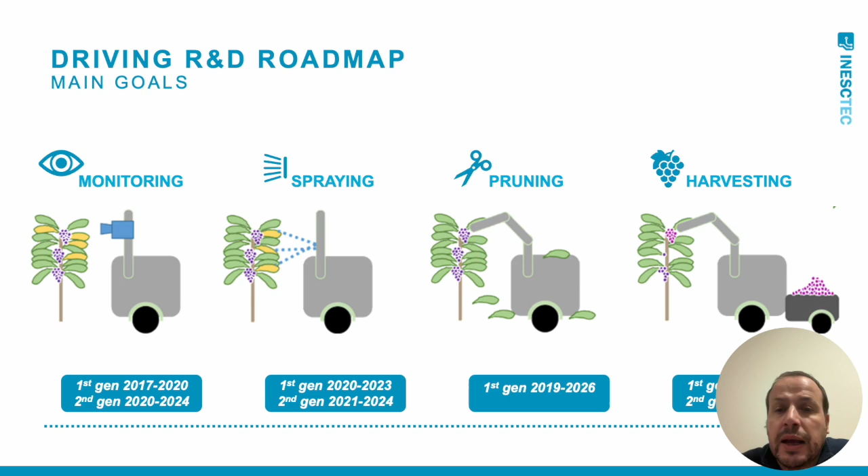As I mentioned, we are a laboratory and a multidisciplinary team. To work on these topics and challenges, we need to tackle this from several perspectives, which means we have several components to work on. At the moment we have 6 groups of R&D topics: safety, mission, supervision, and interoperability, which is in both sides of robotics, IoT and automation.

The outdoor field and navigation topic has several channels to tackle, mostly to solve the problem of navigating in places where we don't have GNSS, or even when the terrain is not flat and has slopes, where the robot needs to be aware of its center of gravity.

We are working a lot on perception systems using AI and deep models to understand the environment, manipulation and grasping, embedded systems and advanced sensors, mechatronics and advanced mechanics.

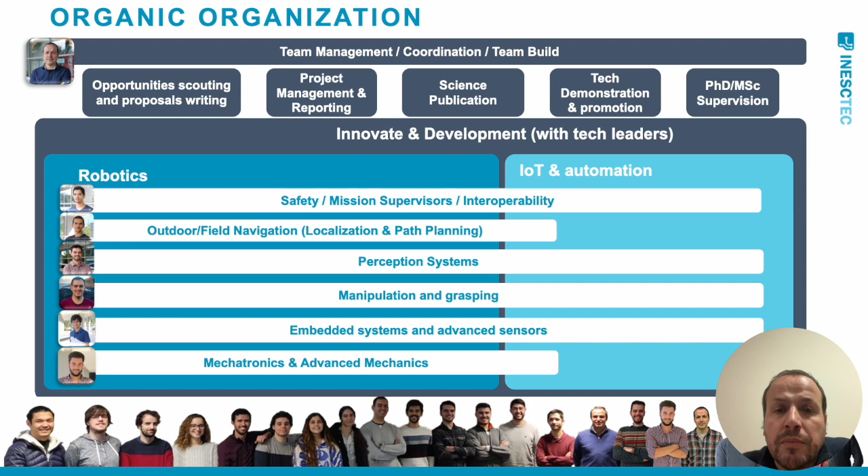At the moment we are 13 persons working in this laboratory, and this is our organization. So the PhD and master's theses developed in this group are supported by a big team that helps make the PhD work more impactful for society, but even more impactful for the PhD candidates.

To support our technology deployment and validation, sometimes this is very relevant also for our PhD candidates: to collect real data in real conditions. To do that, we have at the moment 5 places where we can do these experiments and data collections.

To not take too much time, I will show you some of the results of the laboratory. This is the first robotic solution: a robot navigating in a steep slope vineyard, moving fully autonomous even if the GNSS fails, with path planning.

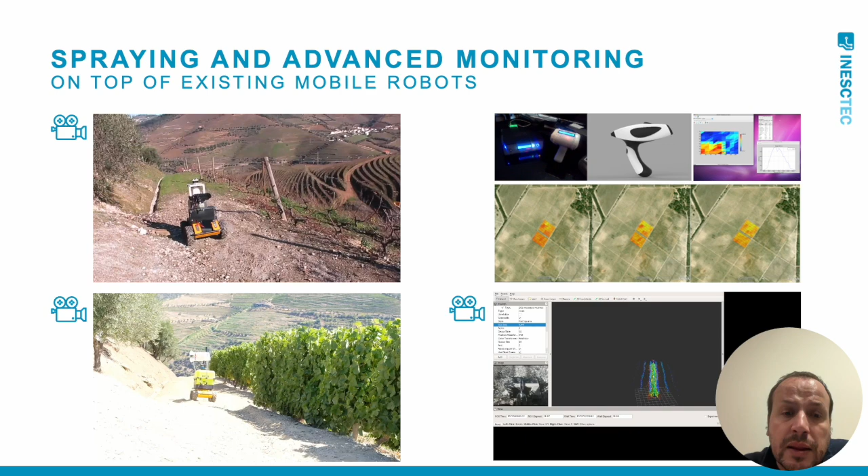This has supported 2 PhD candidates at Inesc who defended their PhD 2 years ago at Utad, and this was a prototype that supported this work. This is another technology.

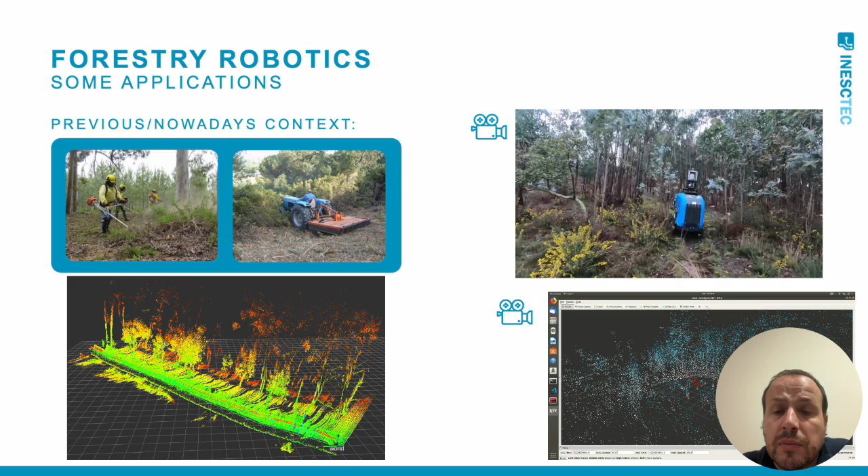This is a forestry robot for biomass collection, and this has also supported the PhD work of another PhD student who defended this PhD thesis 1 year ago at Utad. And this is another robot, the same robot from forestry that we have applied to precision spraying in vineyards.

Taking into consideration that to put this on the market we need technology more prepared for small and medium companies, because they have very limited R&D departments, we have needed to rethink how we can do robotics.

In this way, 2 years ago we had a new start defined as building the full robots from scratch. This will help transfer the technology more easily to the market and support more PhD candidates, not only in software but also in mechanics.

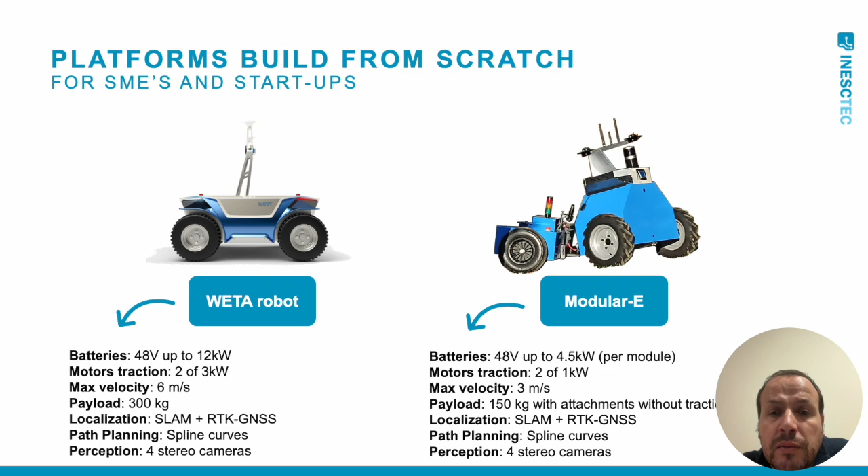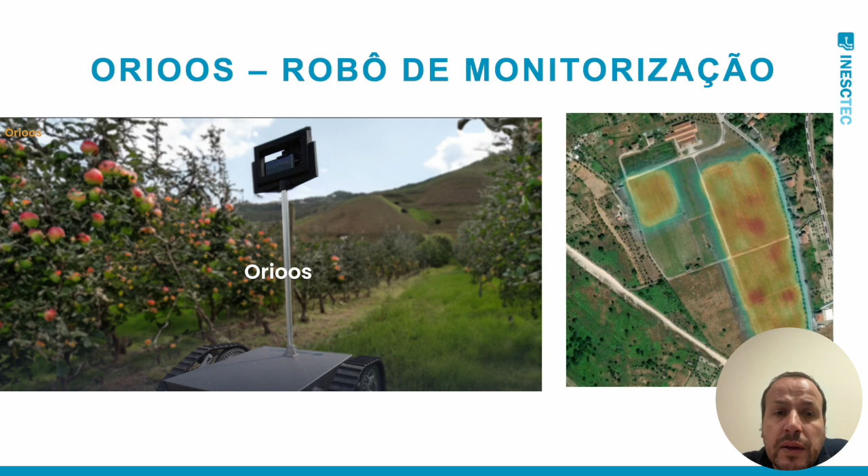Of course this is being evaluated, and nowadays we also have another robot, the Orioos robot, that we hope to make into a startup. This is a small, very small robot built by 10 persons from Inesc, and this robot can go to any field and make an estimation of the productivity map, count the number of apples, and feed the farmer with information relevant for planning the future, where to treat each plant.

We hope with this robot to reach a startup company, and this startup company will have a previous PhD candidate from Utad, and nowadays they are trying to make this technology more suitable for the market, which we are currently exploring.

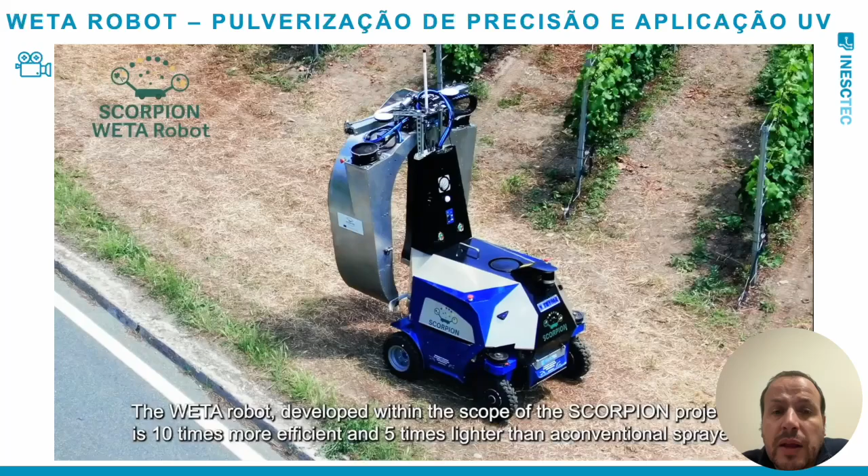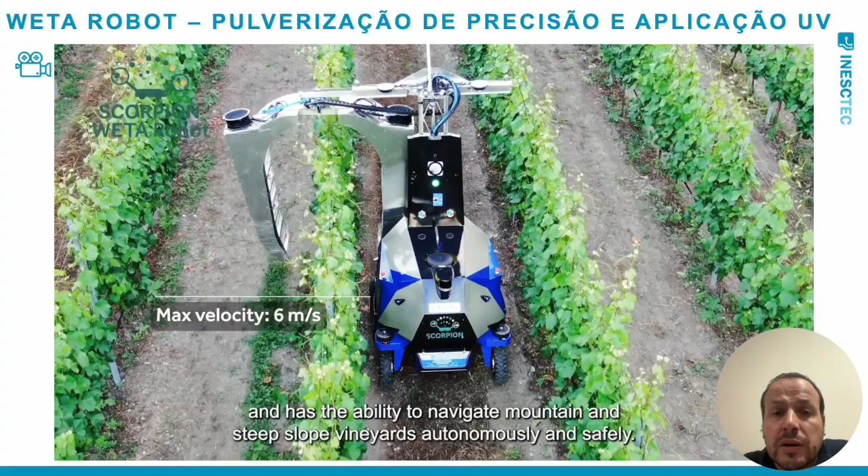This is the Scorpion robot, the Scorpion project. The previous robot I showed you before was updated to reach this novel robot, which is able to go to any steep slope vineyard and make precision spraying with high levels of accuracy, using not just liquids to spray but also UV lights for novel treatments in these vineyards.

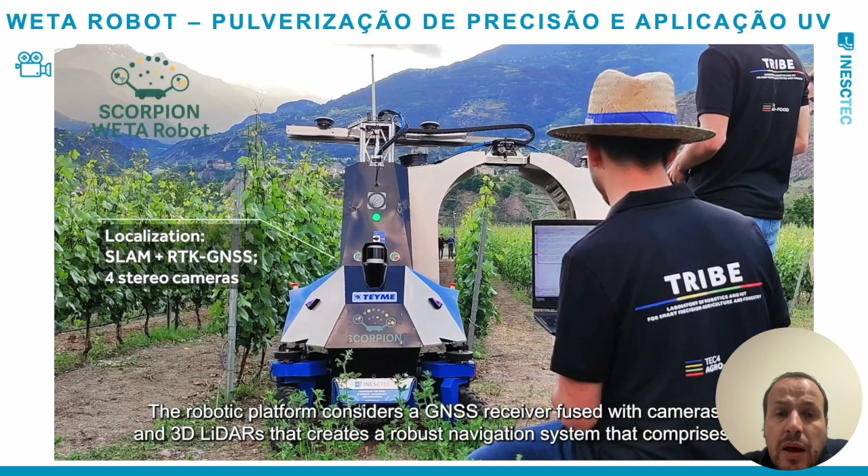This prototype has supported another PhD work that was already defended with success 6 months ago, and the colleague that was working on this will test and validate several variable rate technologies for precision spray.

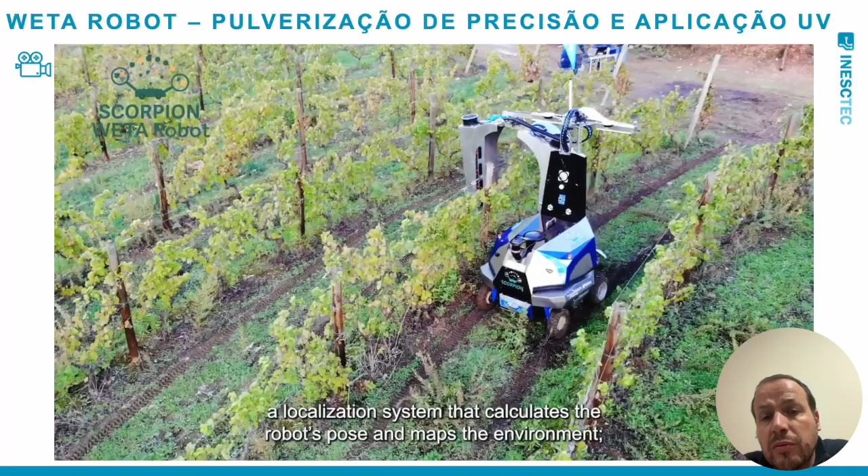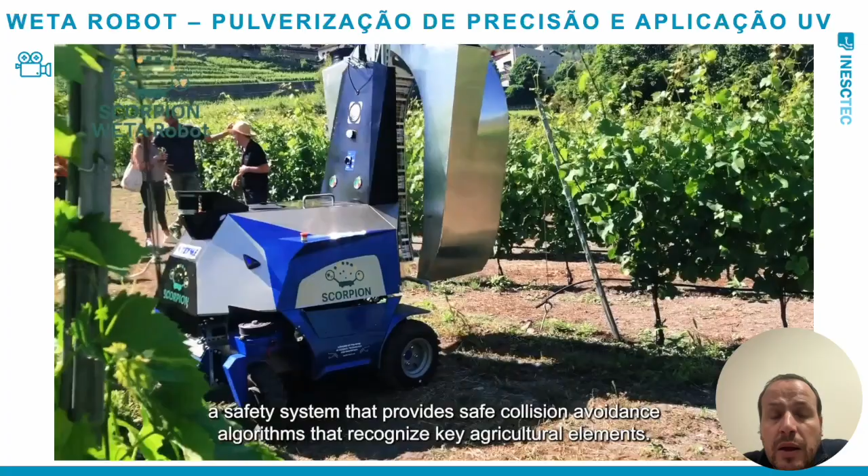As you might see, this is a robot that can operate in offset mode with a recovering panel. This is very relevant for steep slope vineyards because you don't have terrain access from both sides, and it's also a very innovative robot for compacting. This is the model here.

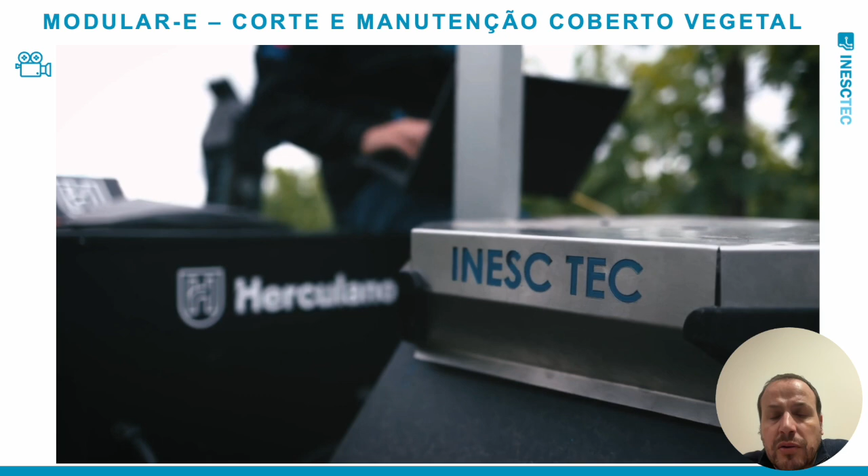As you can see, this is a robot that will operate in vineyards for maintaining and controlling the weeds in the vineyards.

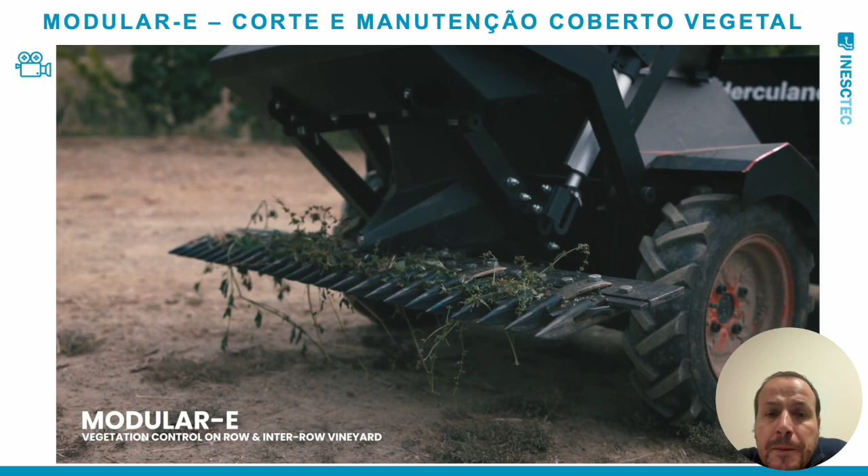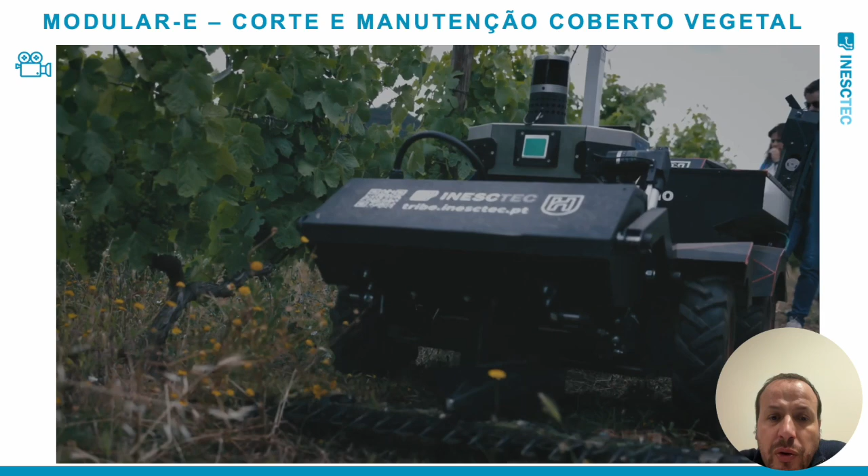This is also another robot that will work in this context and control vegetation growth, and has also supported another PhD thesis on the topic of tools for mowing and vegetation growth row by row. We hope to take this robot to market, and it uses technology developed for other PhD tools, mostly from navigation, path planning, and similar areas.

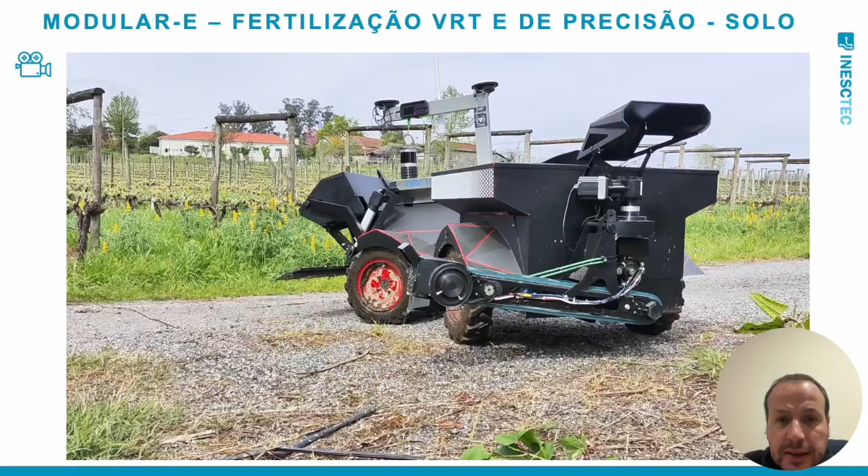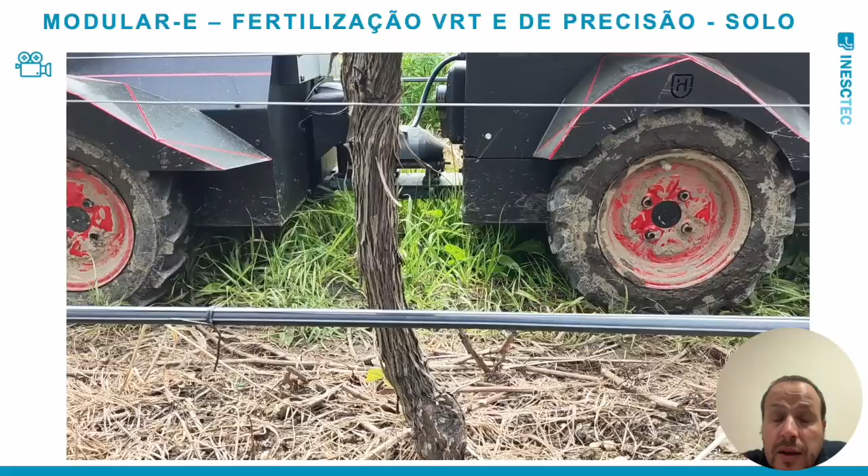Besides that, this is the robot. I want to show you this because it is very relevant. In this video, you can see the same robot using AI technology developed by PhD and master students that is able to detect the trunks and perform precision spraying, applying precision fertilization when a trunk is detected, putting the fertilizer on the right spot in the right place.

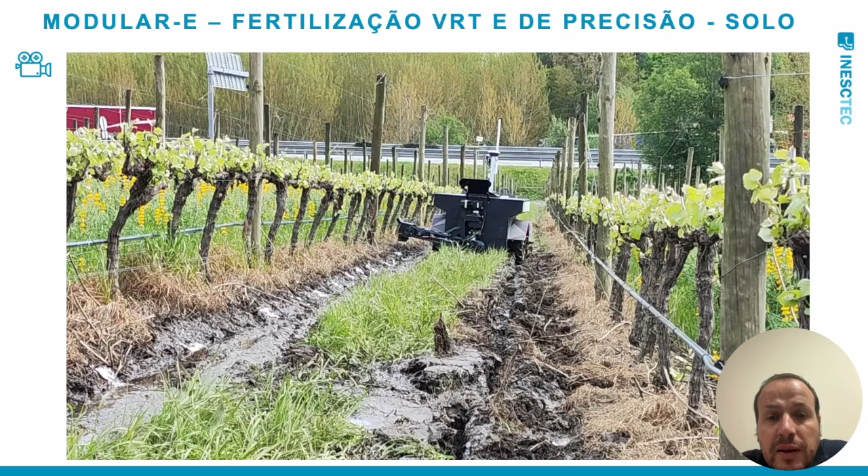This is machinery operating in very harsh conditions, where normally a tractor is not able to pass, but this robot was able to pass through.

This is the same robot making precision spray, as I mentioned before. Here the technology from sprayers was also used.

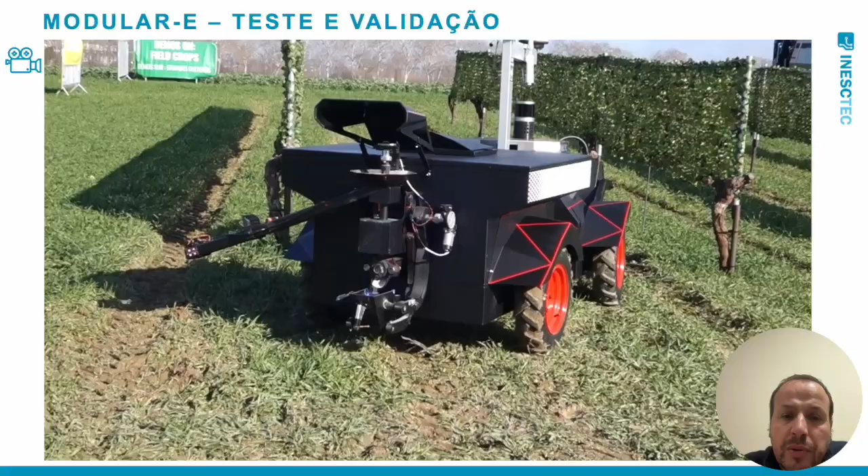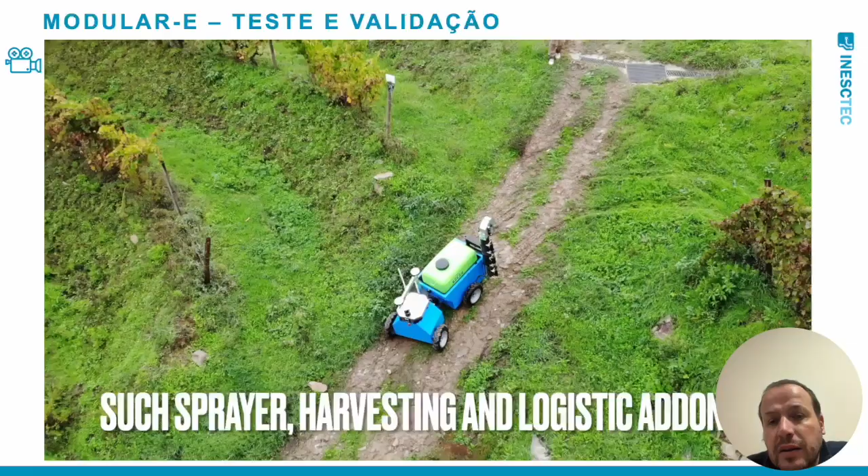This is the same robot operating in several contexts. It was awarded at the FIRA event, and here you can see it operating in very steep slope vineyards like this one, just to support the notion that these robots can operate in this context.

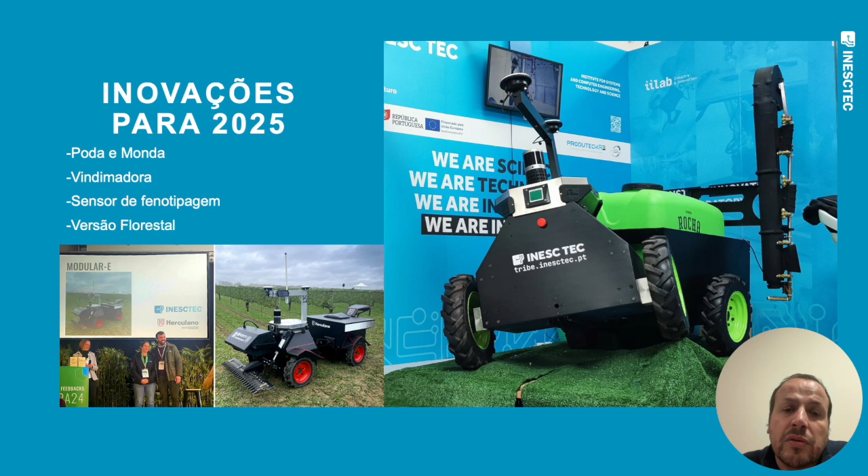We are working nowadays on pruning and harvesting, and we hope that next year this will support new theses from PhD and master students, with the goal of reaching more innovations, so that we do science with impact in society.

Besides that, we have more than 120 publications in the last 10 years, so we have a good impact on science, but also on the side of innovation.

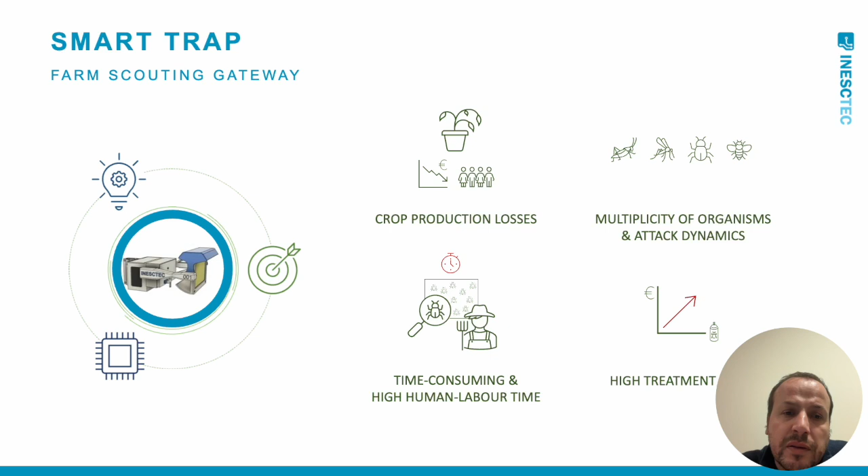Here I can show you some IoT prototypes that are also supporting innovation in PhD and master students. I will not take too much time on this. This is a smart trap for collecting and detecting bugs that could exist and bring diseases. This is supporting another PhD student.

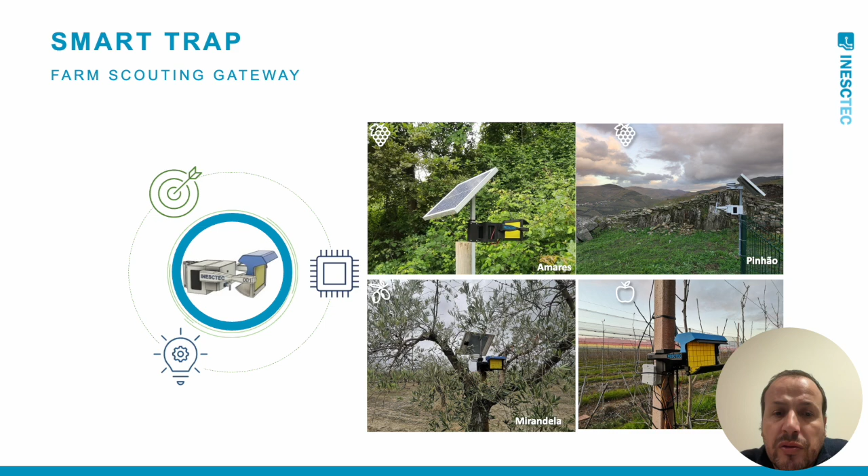This is another solution that we have from IoTs, the smart scissors and the smart bucket. This will help in places where we don't have machines or robotics for harvesting, to collect data and obtain the production map.

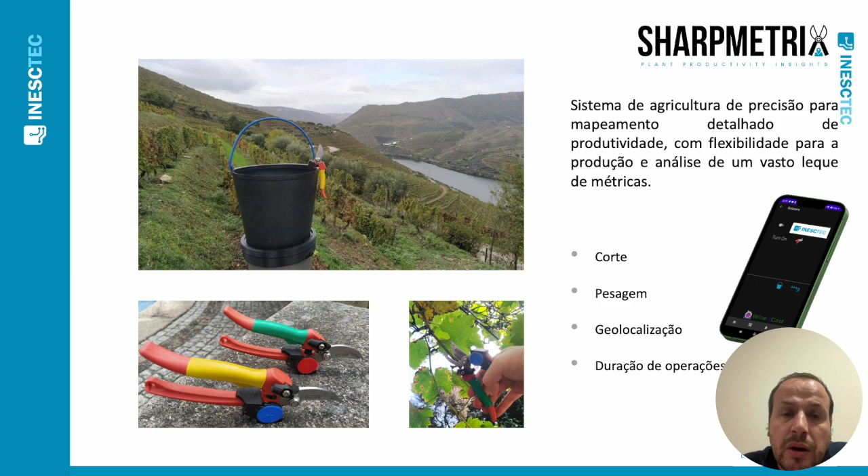This is being done with a colleague doing a PhD at UTAD, and it was also patented. We are hoping that this patent can have a positive outcome, being approved in the coming year, and this is also supporting our PhD students. This is the result of using these scissors, which will help reach production maps that are very relevant for viticulturalists.

In the future, we are working on and exploring more urban farming, agrivoltaics, renewable energies, and experimental facilities for more advanced PhDs in other, more complex topics.